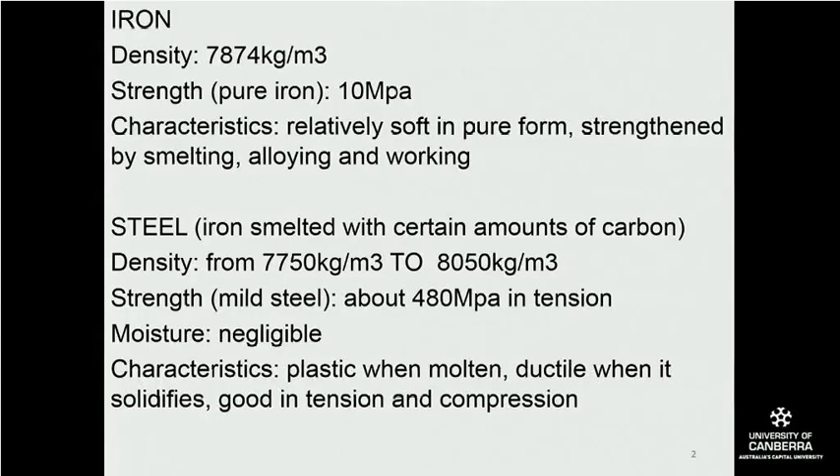So there are 3 main forms of steel, 3 varieties of steel, if you like, that are mostly used today, although they are certainly not limited to this. Mild steel is the most basic form, which is used in construction, followed by stainless steel, which is steel that has been alloyed with chromium and nickel. Now, stainless steel is stronger than mild steel, but it also has the characteristic that it's resistant to rusting. Rusting is oxidation, one of the ways that steel degrades.

And the third kind of steel is called chrome molybdenum steel, which is a steel that has been alloyed with chrome and molybdenum, which then makes it very strong. Okay, mostly used in tubular form. And then there's a whole stack of other alloys that are put into steel, which allow the steel to have various characteristics. Some good, making them much stronger, so you can make them much thinner also. Some bad, because while they might be stronger, they also become more brittle.

Some of them need to be heat treated, some of them are affected by heat, and so on and so forth. So this is more just to tell you that this is out there, and that there are many different processes that steel can be put through to get different kinds of characteristics.

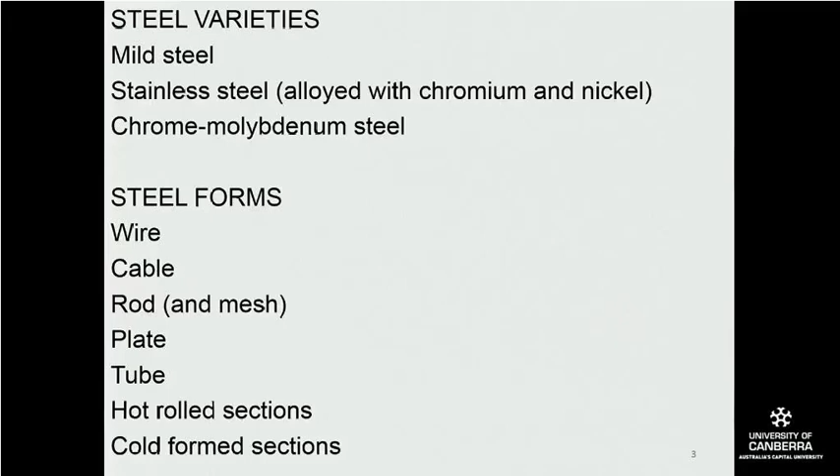So, if we go back to look at the history of iron and steel, really the Iron Age is completely ancient, right? We're talking about millennia before the Common Era. Before Common Era used to be known as before Christ, or BC. Now we use the term before Common Era, BCE.

Okay. So interestingly, steel wasn't actually used that much for a long time, or at least the development of steel did not go through big leaps and bounds for a long time until the 19th century, when they started to learn how to make stronger forms of steel, which were also mass producible.

So cast iron is probably the most basic form of turning iron ore into something. It has some carbon mixed into it to bring the melting point down. And what happens is that you basically pour it into a mold of something useful, such as a frying pan, as you can see on the right. But it is quite brittle, so it's got a strength of only 27 to 55 megapascals, which is a bit stronger than the strongest timbers.

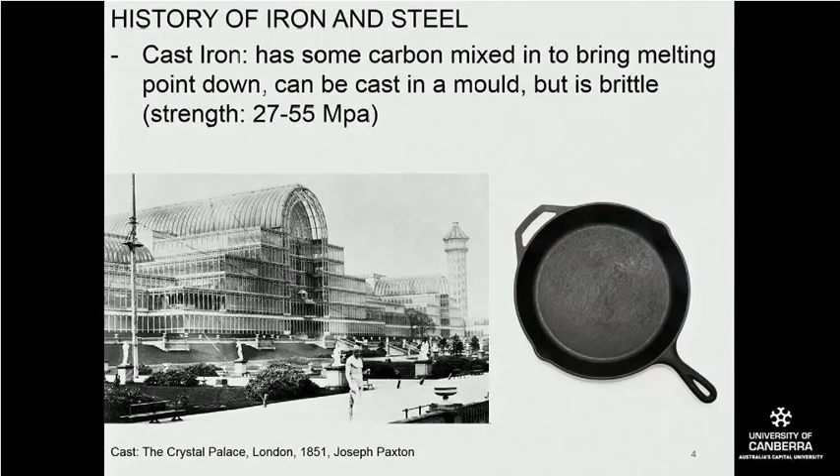Now, so that's what cast iron is. Wrought iron is smelted iron that has been worked by forging, extruding, rolling, hammering, and so on, which makes it significantly stronger. So you can see cast iron was only up to 55 megapascals, but the moment you start to forge it, which is basically to press it into a form under pressure rather than just pour it into a jelly mold, extruding it and rolling it, hammering it, and basically working it, it becomes much stronger.

So the best example of a wrought iron building is the Eiffel Tower, not in London.

Let me just fix that. This is a problem with copy and paste, right?

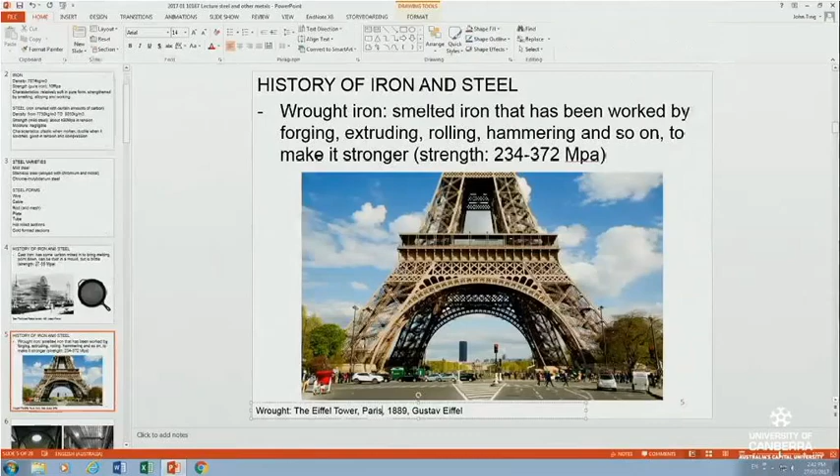In Paris, of 1889, by Gustave Eiffel, another structure that was built as a gateway building for an international exhibition in Paris. So essentially, it needed a lot more work, but you needed a lot fewer members to be able to get something of the same strength.

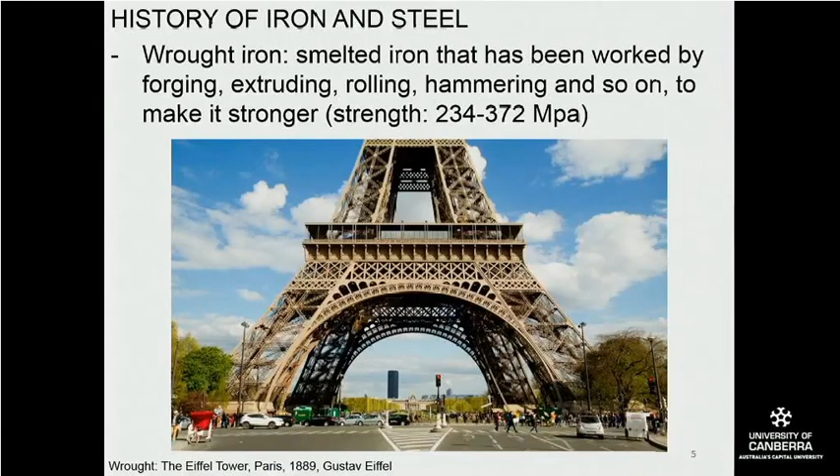Now, this was 1889, and in 1850 you already had the wrought iron technology in France, and this building, the Bibliothèque Sainte-Geneviève in Paris by Henri Labrouste, is a building that uses both cast iron elements, as you can see with these columns here, with the cast column heads and the cast bases, as well as wrought elements which are then assembled together.

And in the stacks here, you can see much better examples of all the different wrought iron elements that were used in it, used together with glass for glass roofs and what have you. So we're beginning to see that it's being used for everyday buildings.

Steel, of course, when it was first being used, was only deemed to be a temporary material. The Eiffel Tower and the Crystal Palace were both temporary buildings. Crystal Palace was taken down very soon after, and the only evidence of the Crystal Palace we have left is the Crystal Palace English soccer club, whereas the Eiffel Tower has managed to survive until today.

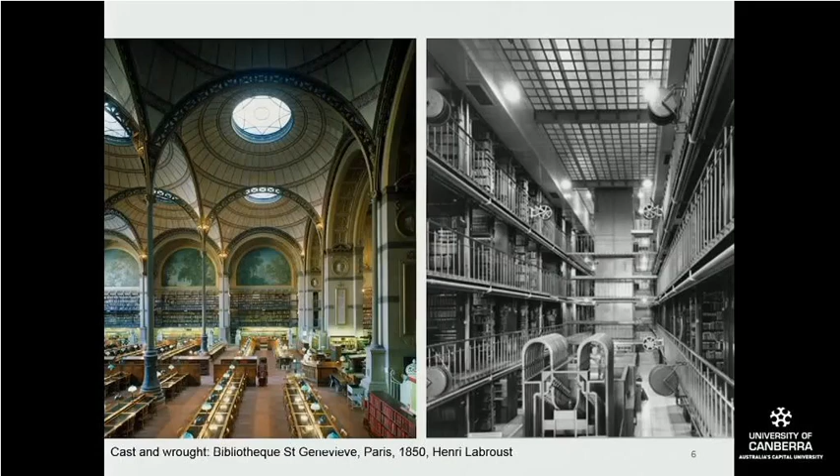Now, in the 1850s, there was a process called the Bessemer process that was invented in order to be able to produce steel. So steel, of course, is stronger than wrought iron as well. And that involved blowing air through molten iron, which had the effect of removing impurities. So this allowed for the next level of strength in terms of products made from iron.

And this kind of steel was the one that actually fed the whole skyscraper boom in New York and in Chicago in the late 19th century. So if you just look at these pictures, in particular this one here, and look at the number of members you've got there, and compare it to, say, this, you've got a lot less members than you did in the Crystal Palace, right? Because each member is stronger, you can use less of those members to make things like buildings.

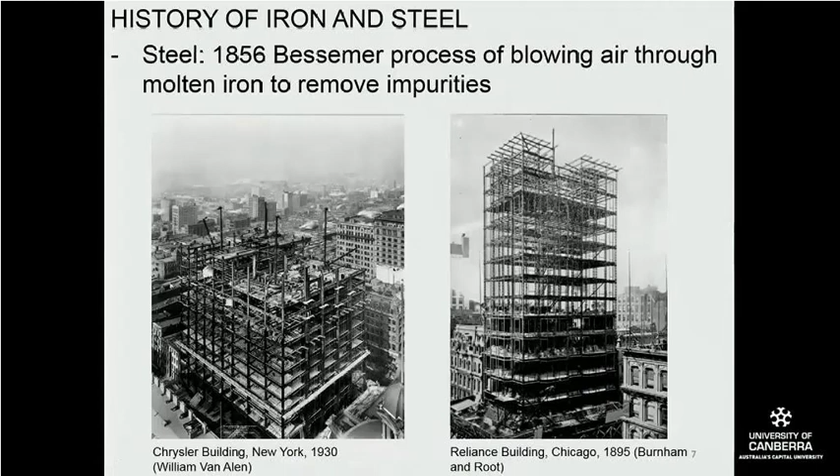Now, that's the history of it. The way that you procure iron ore, iron comes from iron ore, is that you dig it out of the ground. Okay, and this has been done for millennia. But what's happened in the late 20th and early 21st century is this is done on a vast and industrial scale. So you can see the size of the hole there. This truck that you see here is about the size of half of this room. So you can tell the levels to which we as humans will go to actually get this stuff out of the ground.

And of course, one of the reasons for this is that there's a lot of iron ore in the crust of the earth, okay? So it's easily available and it's easy to get out, even though it leaves huge holes in the crust of the earth. So once it comes out of the earth, it's then shipped to iron mills or steel mills where the iron ore is then smelted into liquid form, which is the first process in getting it into shapes where it can be used. So when it's smelted, it's then basically rolled into various blanks.

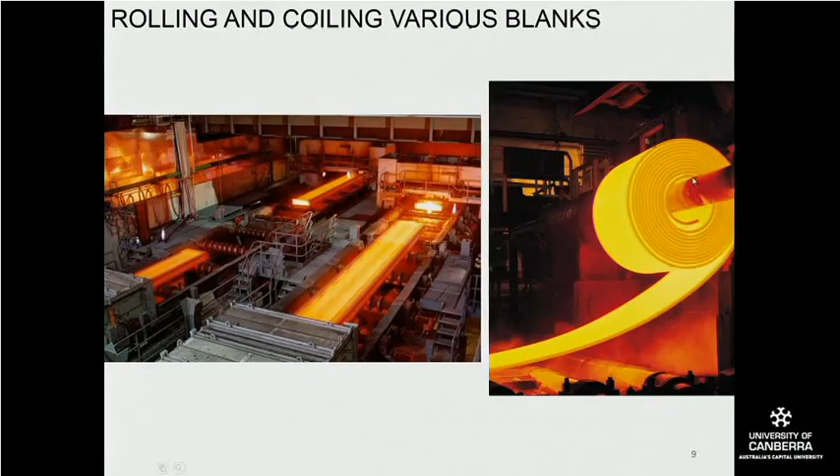So the first kind of steel sections that we'll talk about is hot-rolled sections. So essentially, hot-rolled sections are made from the various blanks that are produced. And to get them into this shape, you basically need to heat up your blanks to a certain temperature where it starts to soften but not fall apart, okay? But before we get onto that, these are just your common sort of sections.

So what we have here is rectangular hollow sections, RHSs. We have circular hollow sections, or CHSs, which are also called pipes. We also have square hollow sections, which is basically one of these, which is square in section. But in the construction industry, we also have things like channels, steel angles, and steel universal sections, which come in universal beams or universal columns.

Universal beams are much deeper in their section than universal columns, which tend to be more square in their section, meaning the height and the width are more similar. Quite often called I-beams as well, incorrectly. So what happens with the hot rolling process is you essentially get a blank, which is roughly formed into a rough shape, which is then reheated and is put through all these processes, and you end up with something that looks like this.

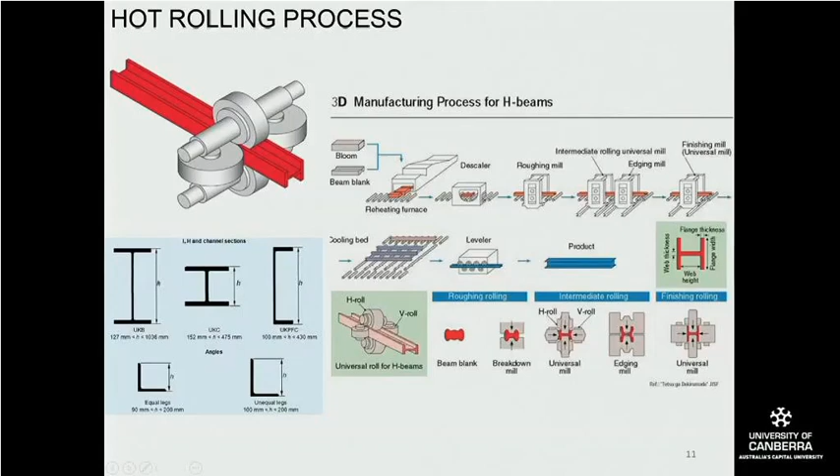Now, famous users of these kinds of steel members would be the Crown Hall building at the Illinois Institute of Technology by Ludwig Mies van der Rohe in Chicago, 1956, and the building that he inspired, Skidmore, Owings and Merrill's Lever House in Manhattan, which was the first large curtain wall building in modern building to be built.

Now, please excuse me when I use these names, because it is a habit of architecture. Because architecture is such a complicated activity, and there are many different groups of people involved in both architecture and construction and getting a design built, architects, because there's so much to talk about, tend to abbreviate the creators of buildings down to one person, like Mies van der Rohe, or one firm like Skidmore, Owings and Merrill.

So it is not my intention here to say that Mies actually got out there with a rivet gun and put the whole thing together. It is just a short form to say that he was the guy who designed the building. All right? So for you guys, when you're talking about architecture, please keep this in mind.

It takes a lot of people to build a piece of architecture, and the habit that architects have, which I also have, to only use the name of the architect is only a short form, because there's so much to talk about. It doesn't mean that that architect did everything. Okay, any questions? Okay, moving right along.

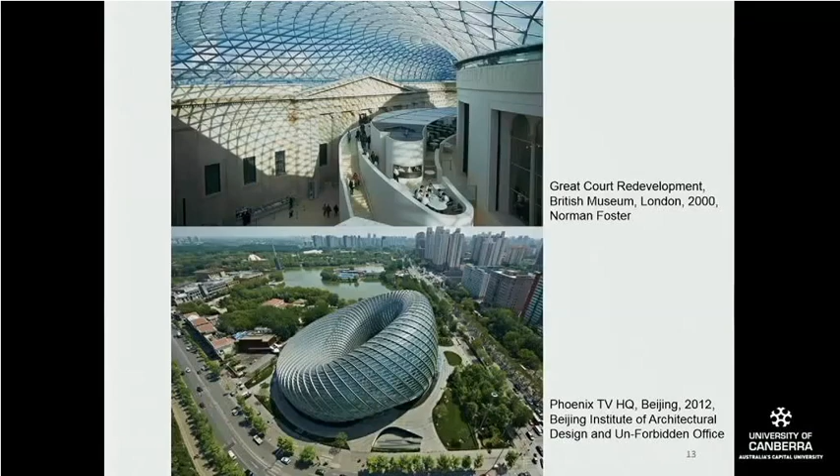Quite common nowadays is cold form sections. Now these window sections here are all hot rolled sections, as well as these tubular sections, the circular hollow sections and rectangular hollow sections used here. The other form of steel that's very commonly used is called cold forming.

And what happens with cold forming is you take a coiled up sheet of very thin steel, between 0.2 and 0.7 of a millimeter, maybe 1 millimeter in some cases, and you fold it or roll it into the shape that you want. So you see with these kinds of roofing profiles, they are all put through a roller, which I'll show you in the next slide. But these ones can be folded as well, and are used in steel stud frames.

So these are very lightweight bits of steel that are spot welded together or riveted together to form walls. These are very cheap to produce, and for their weight, they can be very strong as well, and very commonly used.

So next time you are in the Bunnings or the Officeworks, if you look up, you will first of all see probably some sort of hot rolled section as a post and as the beams. And on top of that, the things that are connected to the roof, the purlins, are generally cold form sections. All right, so what you guys should try and do is to identify the bits of steel that you can see around you, and see if you can figure out whether it's a cold form or hot rolled section.

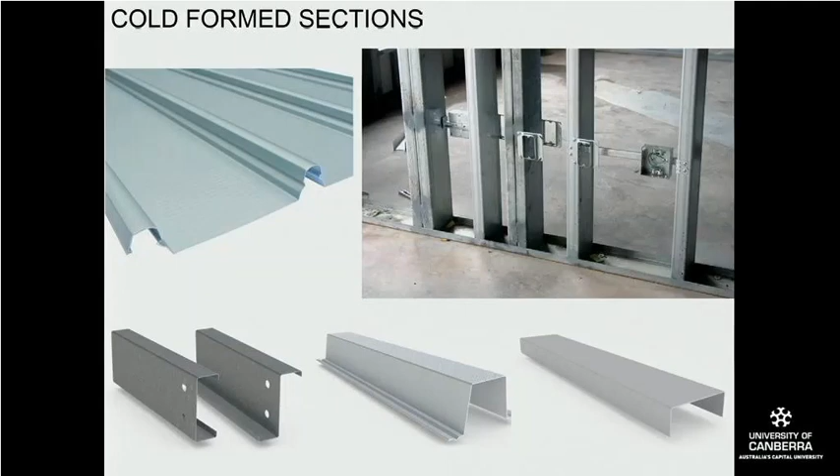So what you can have in very big projects, such as the new Melbourne Convention Centre by NH Architecture and the Victorian Government, they actually bring the coils of Colorbond steel out to the site. They have the roller on the back of a truck, and they basically roll it out and lift it straight up onto the roof.

So it's rolled up onto the roof, because of course if you have to ship it out there, articulated trucks can take something up to about 11 meters, but the roof on the Melbourne Convention Centre in parts is about 60 or 70 meters long, and it's one piece of steel. Okay, so we are figuring out different ways to use this kind of technology by bringing it to the site, because of course these things will happily sit on the back of a truck and not even need to be a very big truck.

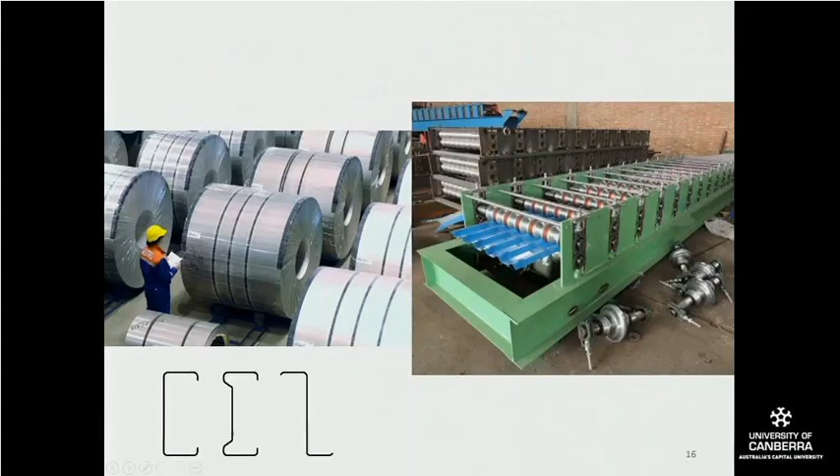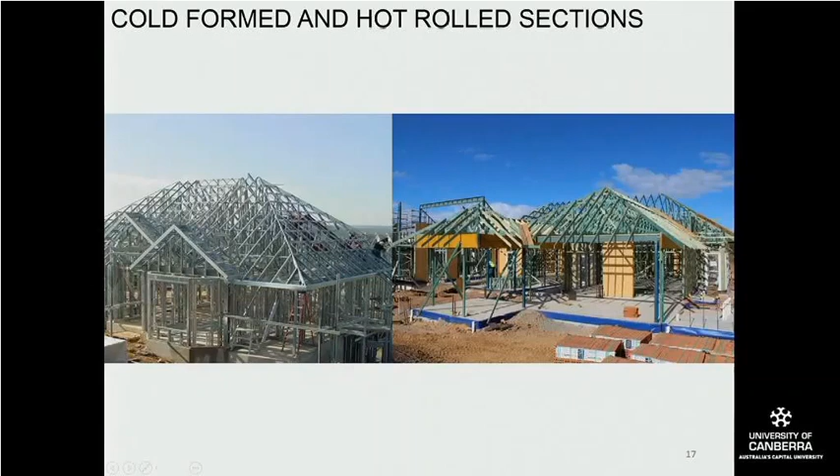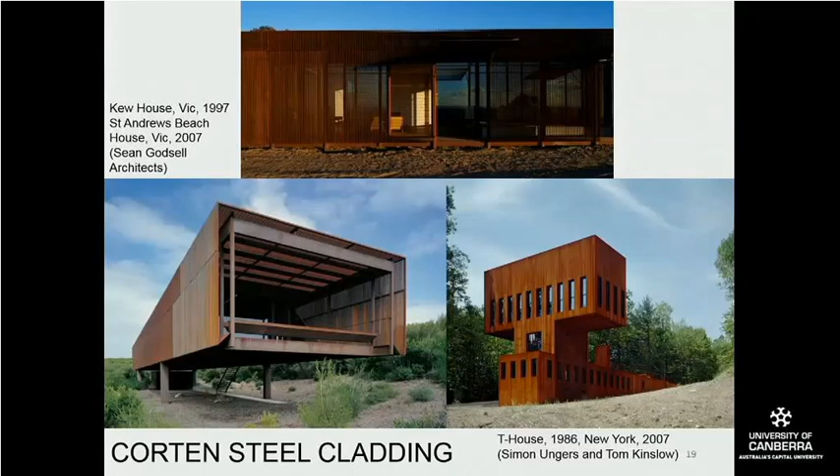More solid pieces of steel are also used in architecture. This kind of steel, what we see here, is called Corten. It's actually a steel that architects use because they like the rusty look to the building. Okay, it has a characteristic where it will rust to a certain level, and then the rusting will dramatically slow down. In due course, the rust, of course, will eat through it, but if you can get 20 or 30 years out of it, then the steel has done its job.

Now, rust is the way that steel degrades and iron degrades, right? And no steel or iron product is immune from rust. Even stainless steel will rust in the right conditions, right? So all iron and steel products will rust in due course. The other name for rusting is oxidation. So it's a chemical process where the exposure of steel to the air actually creates this process.

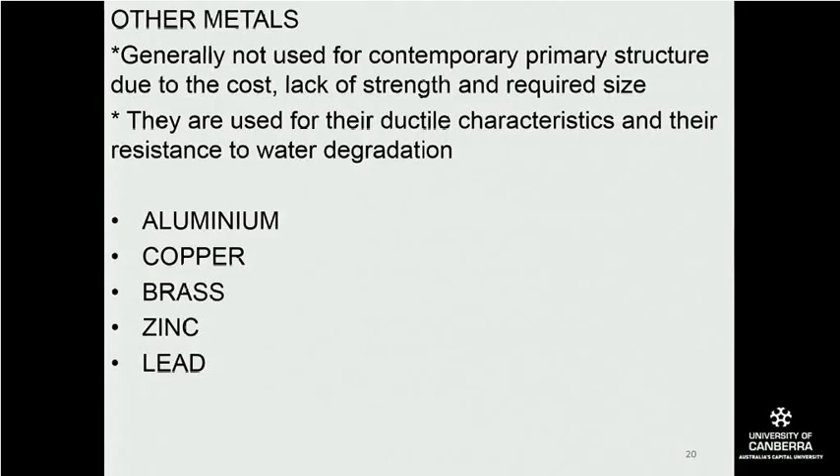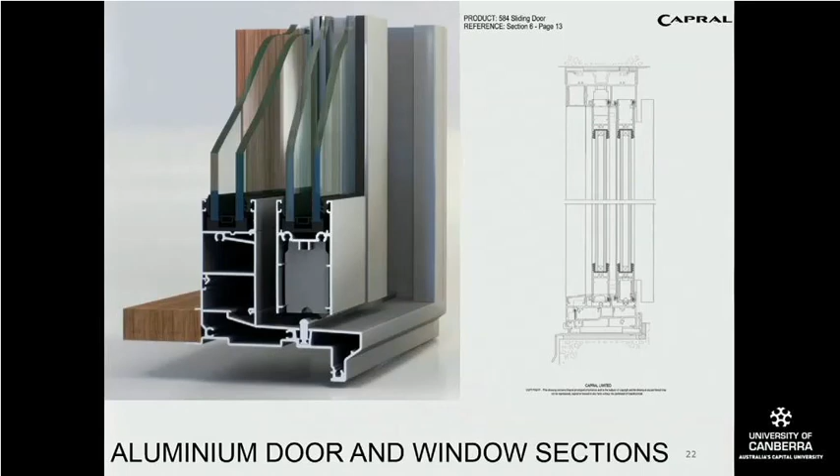Let's start with aluminium. So aluminium nowadays is most commonly used for door and window frames, where they are basically extruded. So what happens is that they come in big bars, long bars, and because aluminium is relatively soft, you can actually push it through a die, which means something in the shape of a profile, such as this profile you see here. And what will emerge out of the die is basically this shape here. So this one here would have been basically a rectangular block that's like that. That's basically been pushed through a die, and it comes out as that shape.

Okay, so you can't actually do that with steel unless it is heated up. With aluminium, you can do it at room temperature. Okay, which means that there's one step less to get this done for aluminium, which is why it's used so regularly in this. If you make it into certain shapes, it can be actually quite strong, and us inventive humans have figured out all different ways of extruding it so that it can clip together, be screwed together, and so on and so forth.

So this is really one of the more common forms of making door and window frames, especially in commercial and office type and high-rise type applications. Quite common also in residential applications. In fact, becoming more so as timber is getting more expensive and harder to find in large sizes.

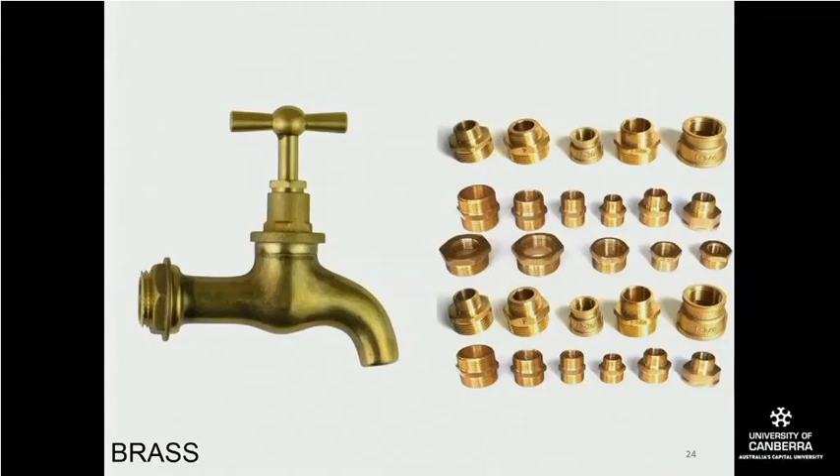Now, moving right along, the next metal I'd like to talk about is brass. Now, brass is also an alloy. I can't remember what goes to make brass, but essentially brass is this kind of goldy greeny color. Its particular property is that it does not degrade when it comes into contact with water, which is why brass is often used for plumbing related fittings, like taps and connectors and so on and so forth.

In fact, all of the chrome taps that we see in our bathrooms are actually made of brass and then chrome plated. So if you ever see something that has the abbreviation CPB in reference to a tap, it means chrome-plated brass. Okay, so brass is basically the stuff that's doing all the work, being exposed to the water, meant to hold together without rusting. It doesn't degrade in water, and the chrome is really what we like to look at.

And once you get that green coating on it, that green coating is also very strong and thus will not degrade when it's exposed to the weather, to the climate. Yeah, copper has also historically been used as pipes, water supply pipes, as well as waste pipes. Again, because it's impervious to, it doesn't degrade in water. But more recently, we're starting to use reinforced plastic pipes rather than copper because of the cost of copper.

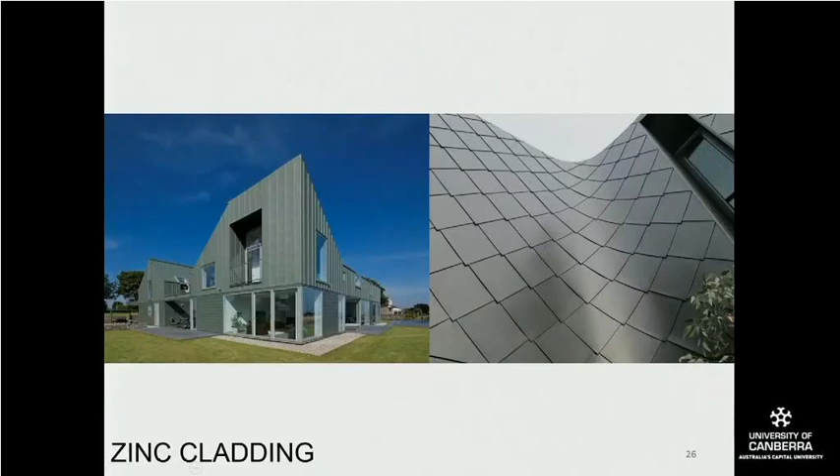Yes. Look, with all of these materials, they are all still used, primarily because they are very long-lasting materials and they exist on buildings. So especially if you deal with older buildings with lead flashings, you will still have to use it. Yeah, and it is a really good material, especially when you're trying to match up two different lumpy materials. It actually forms very well to it. So of course you don't want to be eating it, but because it's so soft, you do need to have a solid substrate underneath it so you don't just step through it.

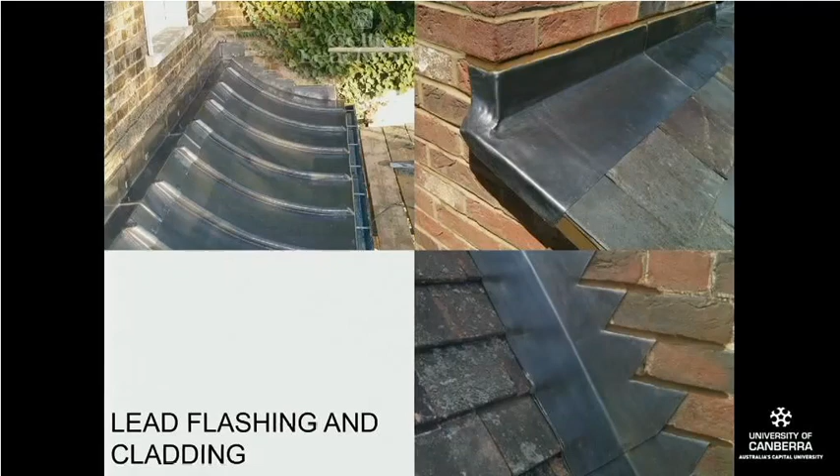All right, are there any other questions? Yes? No, it's not. No, it's not. And I think that only happens in certain circumstances. Like if you open up most taps, you don't see the green stuff inside it. Yeah, it's only if you've got standing water. You know, often you see it around the threads of the connectors, but it's not hazardous. No. Yeah. Any other questions or observations?